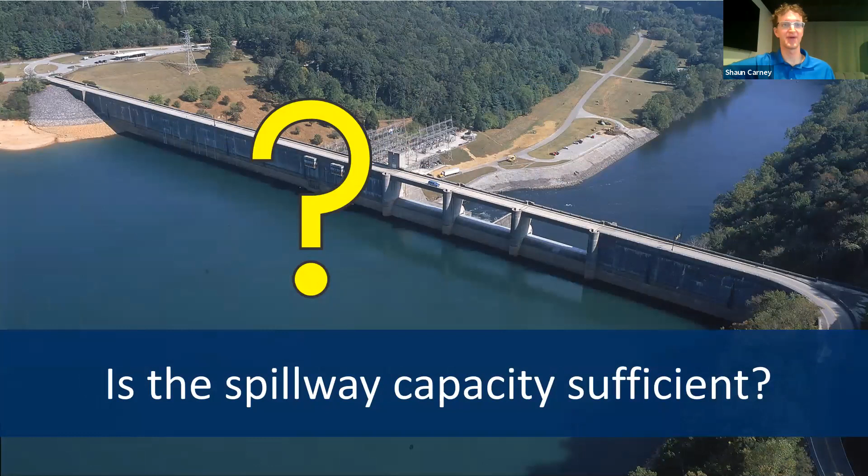If we're considering just a single dam, how do we know if the spillway capacity is sufficient, or how can we assess that? And so all these ultimately are asking the question, where should funds be spent? And how do we decide whether to address one issue or another, or focus on one issue or another? And so where does risk analysis fit into this whole decision-making process? And so we're going to be focused on risk today.

And so we thought we'd just start. There are three main components to risk, and we can break this up a little bit differently, but the three main components are the likelihood of the loading, that there is potentially a large flood that could come and overtop the dam, or there's a seismic event. And then there's the second component, the probability of failure given the loading. So given that a dam is overtopping or there's a seismic event, what's the chance that the dam could fail?

And then what are the downstream consequences? If a dam were to fail, what would be the consequences downstream? Or if some component of the dam were to fail, there might be less consequences. And so those are the three different pieces of risk.

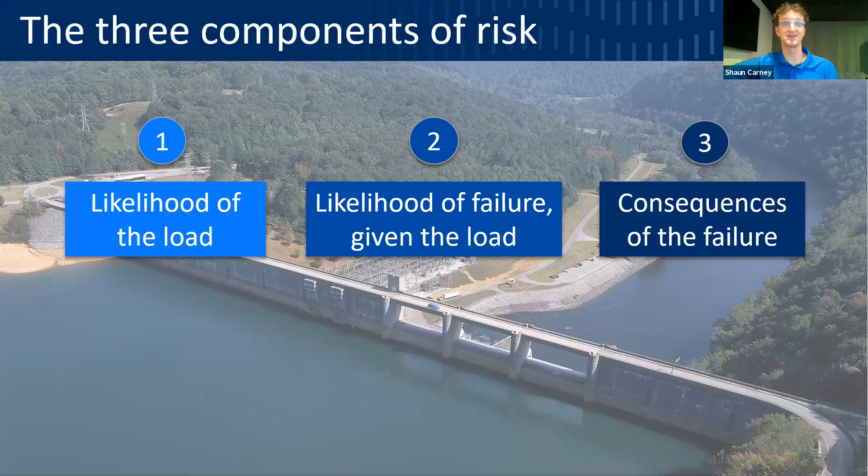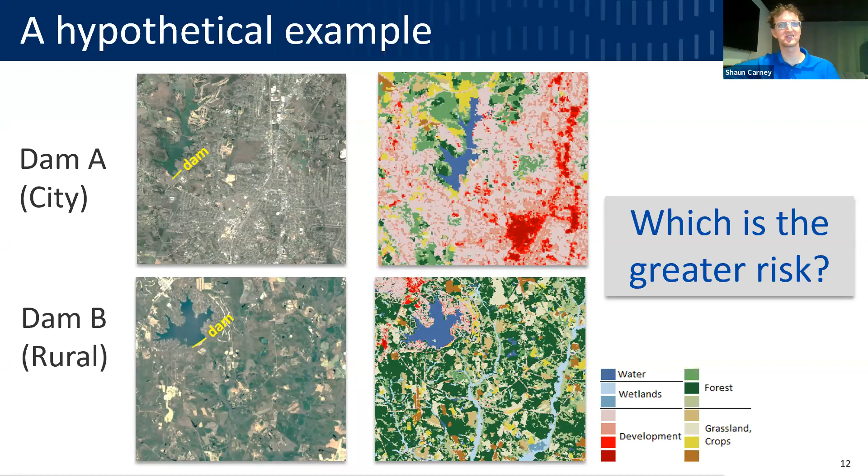And so we just wanted to talk through, just to start off, just to get our heads in this realm, a hypothetical example. If we're considering two different dams, one is located in an urban area, this dam A, and the other one in more of a rural area. Which one would we think, just off the top of our heads, is the greatest risk? Just put your mind there. And so what information do we have to support that when we think about these three different components of risk?

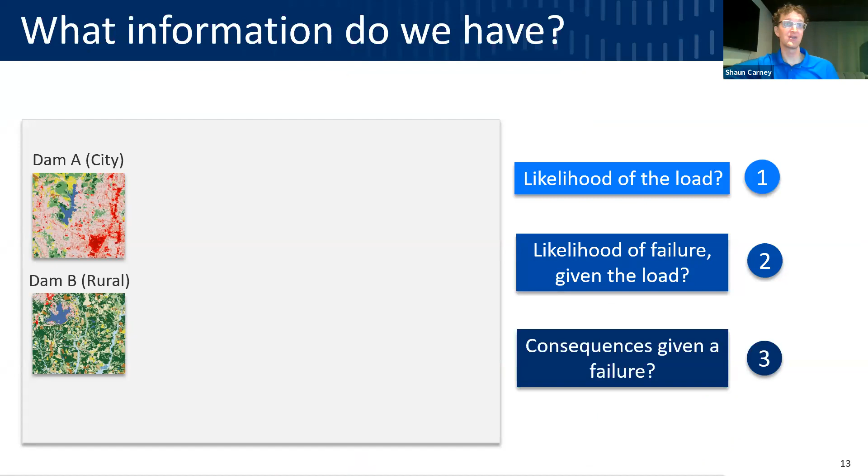Maybe there have been studies that have been done in the past, and we have some information about the dams. We know for the consequences that the dam above the city has a lot higher likelihood of life loss than the rural dam. But there still are people at risk below the rural dam; there could be some life loss below the rural dam.

On the PMF, we may have done a PMF analysis for both of these, and maybe the dam above the city can't pass the PMF, whereas the rural dam has a large spillway and there's no problems there. But we don't really know what the likelihood is of that huge flood, the probable maximum flood.

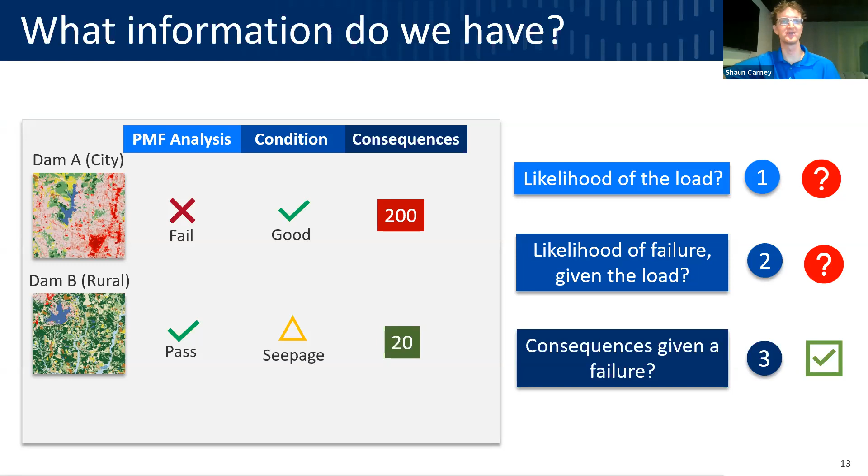And if we look at the condition of the two dams, maybe on the dam above the city, everything is in great working shape. It's been maintained really well because of the setting that it is in. But the rural dam has some seepage issues. But we don't really know necessarily what the likelihood of failure is given that. So here we have just a little example of one case where there are two different dams, two different issues.

So how do we look at that? How do we start to assess which one is the bigger risk? If I'm a regulator, which one is the bigger problem that we ought to be considering? So if we can start to put numbers behind some of these pieces, if we can say, okay, that PMF actually is more like a 1 in 500,000 event, or the seepage actually has a much higher likelihood that it could fail, then we can start to understand what's going on with those.

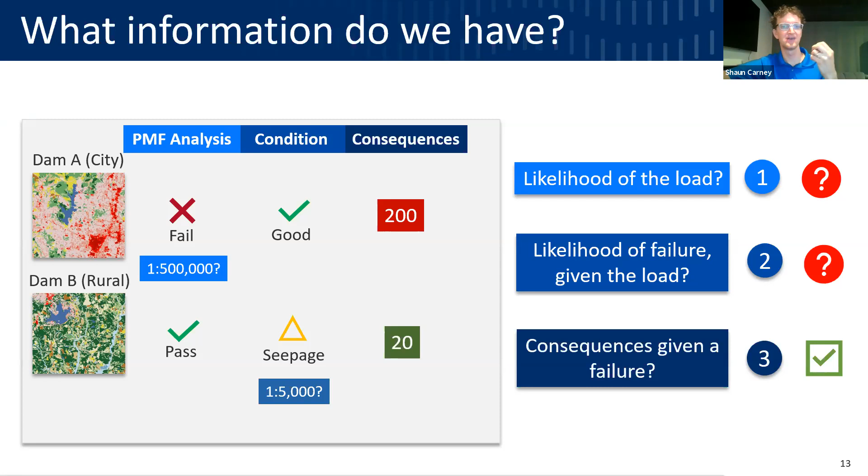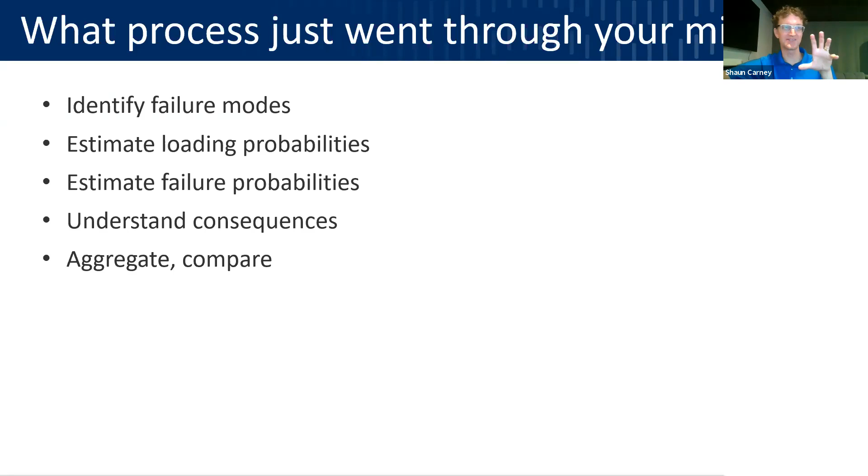And so what process just went through our minds there? First we step through and look at what the failure modes are. We try to estimate the different probabilities, maybe just as a hunch, and then understand the consequences. And in our minds we can pull all that together and say, okay, maybe this one is a bigger risk, or this is a bigger risk. So that really is risk analysis. Even though it's a very qualitative sort of sense, that is a risk analysis.

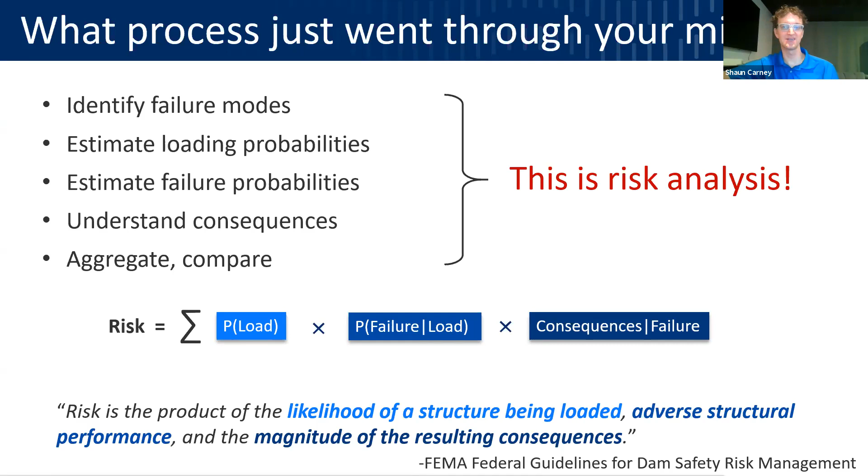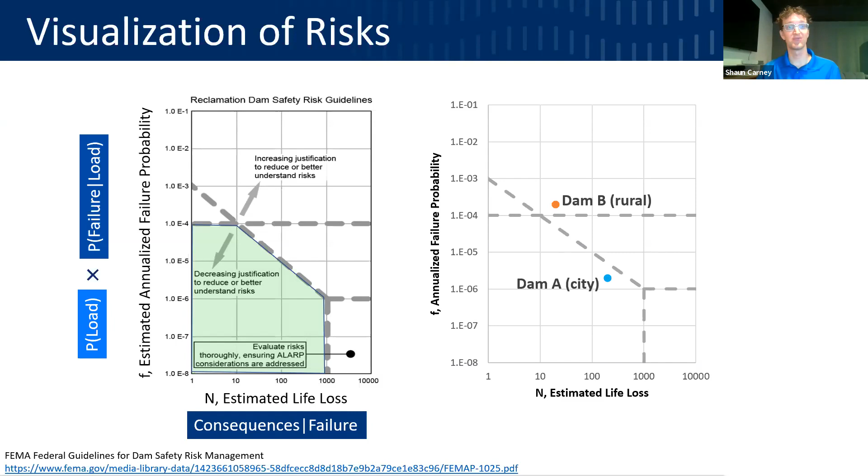And if we plot those on this graph, just using those numbers that we had come up with, in this case, actually the rural dam ends up being at a higher risk than that dam in the city. And so as a regulator, you might focus more on, let's get the issues with the seepage at this rural dam addressed first, and maybe if you have limited funds, focus on that one first.

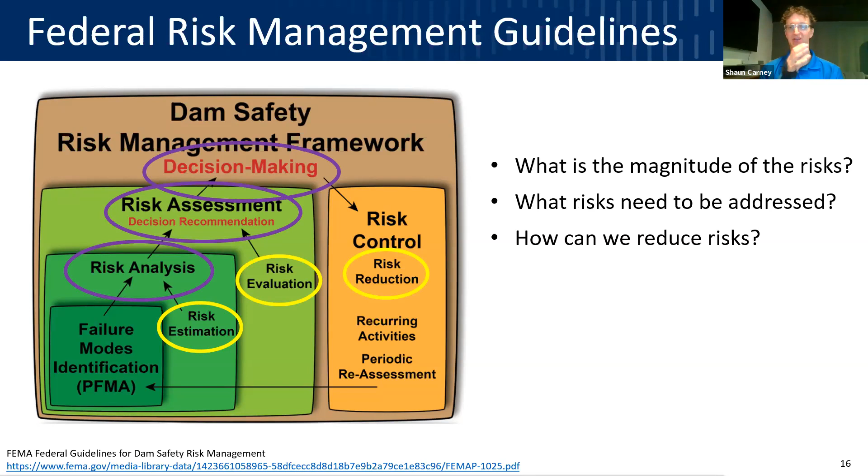And so the federal guidelines, they have this graph, which I think helps to put together the different pieces and how they all kind of fit together. So we have the failure modes identification, and then the risk analysis, which we're focusing on today, is focused on estimating what risks are. And that really, ultimately, that's not the end goal, though. The end goal is to assess how bad those risks are, and to make recommendations on what a decision should be. And an actual decision will have a lot of other factors play into it, but ultimately, this comes back to having a good estimate of what risks are for a given location.

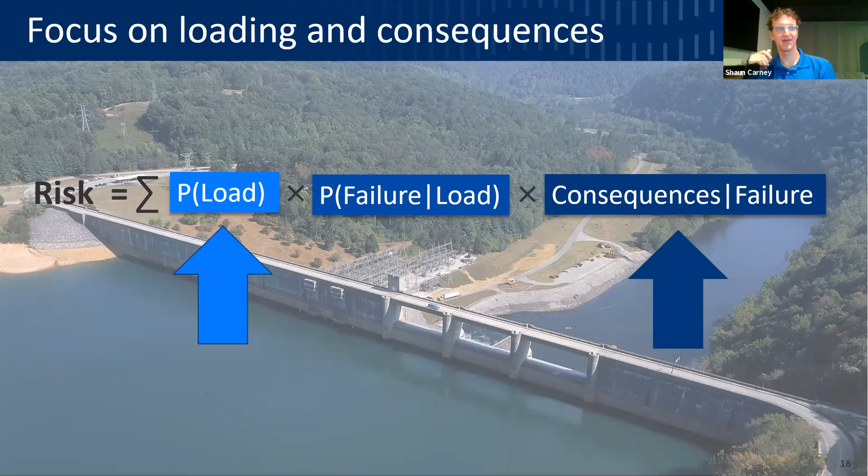So for the rest of this presentation, we're really going to focus on the probability of loading and the consequences given a failure, because those are the pieces that within the Center for Water Resources we have the most expertise in. That's not to say that the middle component isn't important. It's very important, obviously. But we're just going to focus on those two pieces and how those can play into the different levels of analysis that we were talking about up here. And so we'll start with talking about QRAs and SQRAs and kind of how this fits in.

So we'll start just with an example from Mactaquac Dam. This is up in New Brunswick. And for this dam, New Brunswick Power is undergoing rehabilitation over the next years. And so as part of that assessment of what needs to be done, they were assessing their spillway capacity and seeing whether it's adequate or they may need to expand that. And so Mactaquac Dam is sitting on a large watershed. It's essentially a run-of-river. There is some fluctuation in the pool, but there are low incremental consequences if there were an overtopping failure of the dam during a large flood.

And so they're looking at a really big capital improvement investment. And so the question really is, is the spillway capacity adequate? And so to start, they did an initial risk assessment at more of an evaluation level. And on that one, they found it looks like the spillway capacity could be within the tolerable risk guidelines, and that the existing spillway capacity may be sufficient.

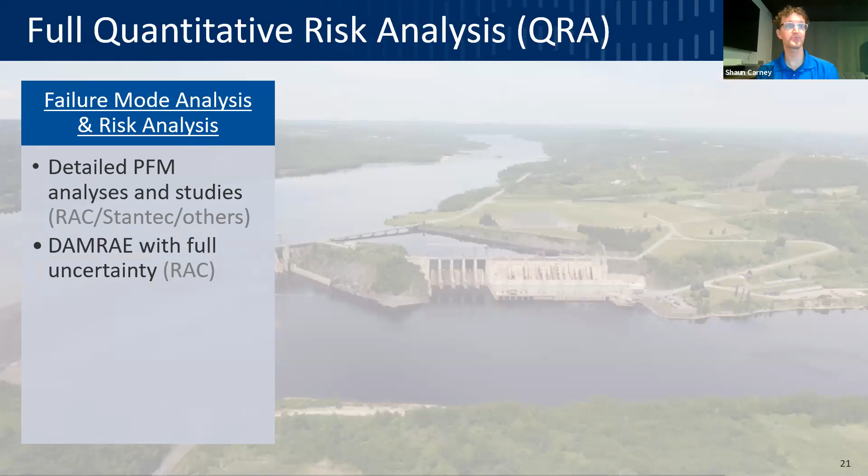And then Stantec is working on looking at the breach uncertainty, and then we'll be using LifeSim with full uncertainty to the specific PFM. So again, this is a case where they're at the point to evaluate, do we need more spillway capacity or not? And so it's a major capital improvement investment. And so it justifies doing a very detailed analysis to understand that.

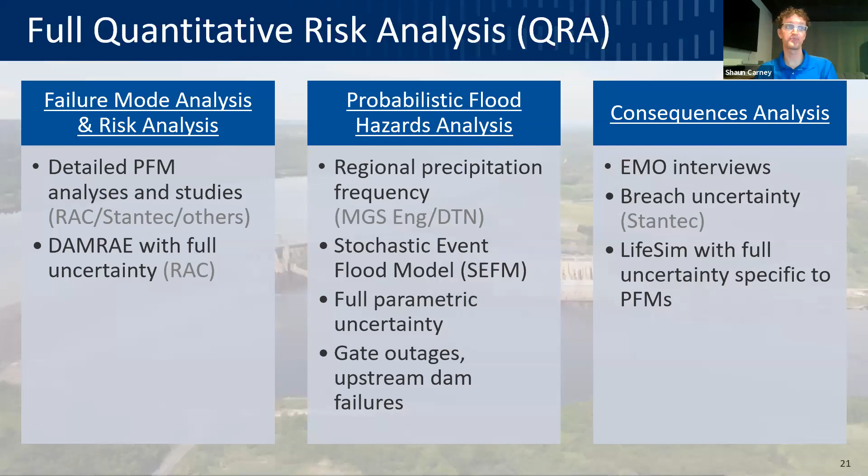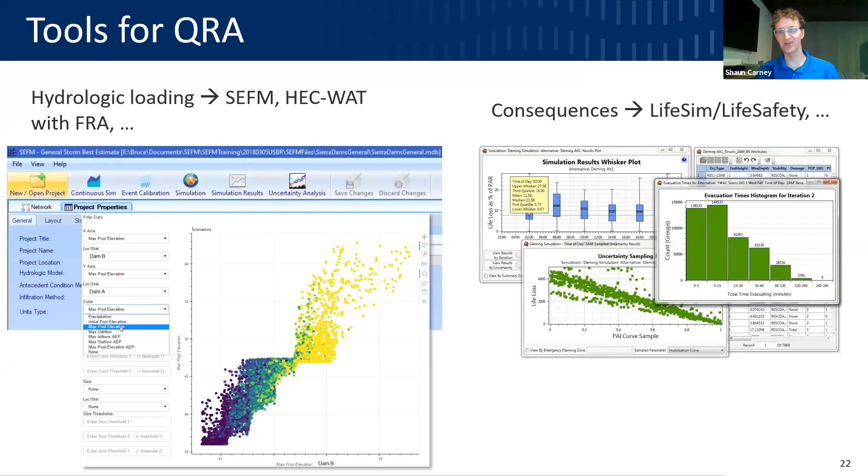But there are challenges with doing a full QRA. It can be costly. It can take a lot of time and data. And then to scale that up to a larger group of dams may not really be possible or really make sense because of the level of effort that's justified. So let's move on to the SQRA level.

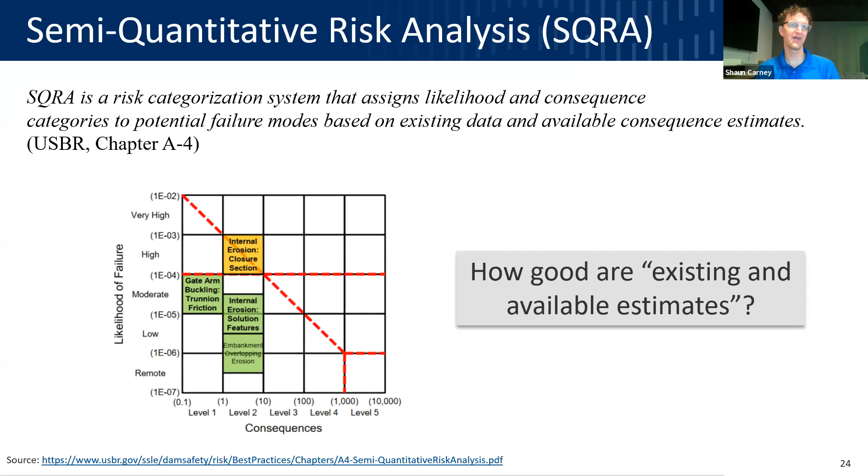And here, we're talking about different failure modes. And the idea is to use existing data and consequence estimates to understand risks. But really, how good are those estimates, and how does that influence things? And so, if we think just about the hydrologic loading, a lot of times we have a PMF, like we talked about earlier, but we need to make an assumption about how to translate from the observed record.

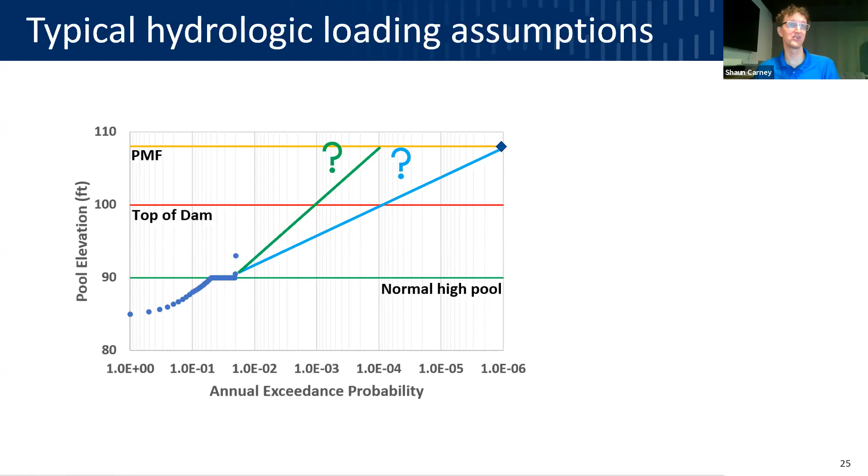Looking at the pool elevation, all the points over to the left of the graph may be observations, but then the PMF we just place out and make an assumption that, okay, maybe that's 10 to the minus 6. But how do we interpolate between the observations and that PMF level? Should we assume the PMF is actually a lot more common? Should we use a more gradual curve? So each of these assumptions affects the way we perceive the hazard associated with overtopping the dam.

And then if we look at consequences, similarly, consider that the green is the tolerable region. And so if we look at a particular failure mode, and maybe it's a 1E-5 level, and we've come up with a life loss estimate that puts us at about 20. Well, that's right on the border between the two.

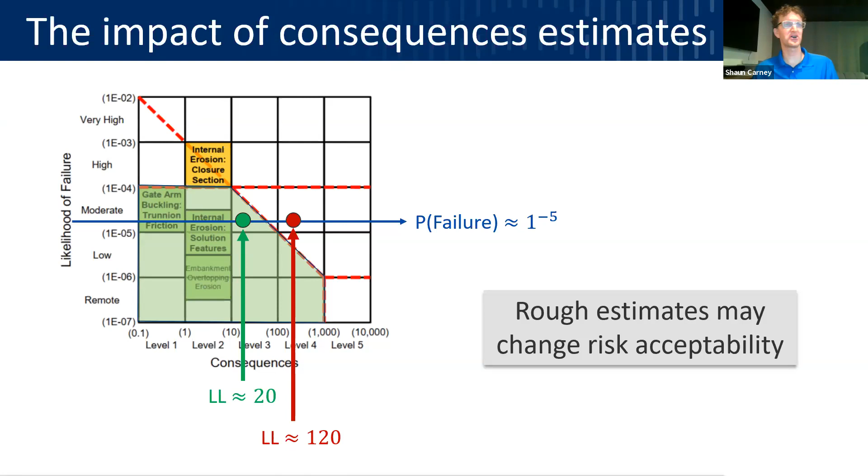But if our life loss estimate is actually higher, just 100 people, or there's 100 more people that could perish in a failure, then you really shift your understanding of what the risks could be there. And it can really change. If you have rough estimates, that can really change the risk acceptability. So I want to talk a little bit just about what TVA is doing on the SQRA level.

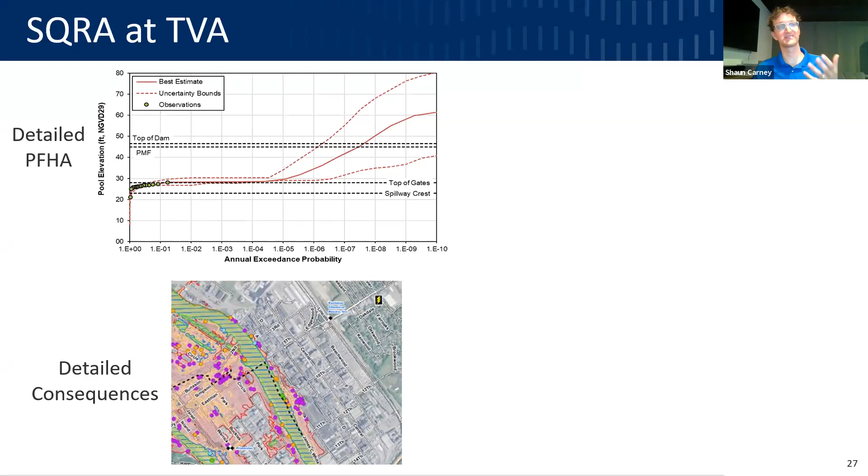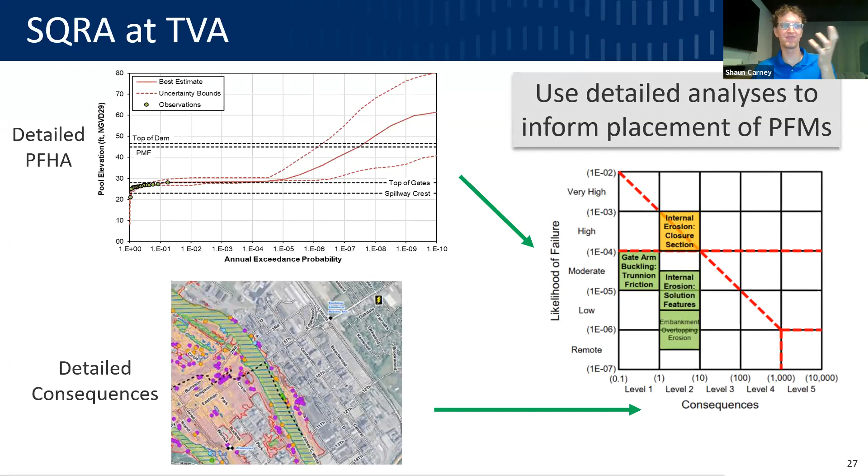They are using SQRAs, but we've helped them to do really detailed PFHA analyses to understand the overtopping probability. And then we've done very detailed consequences estimates to look at that. But then they're using that information to inform where they take the different failure modes and how they place that, how you understand what the consequences are under a given failure mode, and how you understand what the likelihood of failure is for those failures that have a hydrologic component to them.

So there are various tools that can be used for actually assessing the hydrologic loading and the consequences at more of an SQRA level, or getting towards the SQRA level. And so I want to talk briefly about the RMC RRFT tool. This is a tool that we are actually helping the Corps of Engineers to develop. They've recognized the need to really improve their estimates of the overtopping probability for their different dams, and so we're building this tool.

It's a web-based tool. The idea is you could upload a precipitation frequency relationship, or if you don't have precipitation frequency information already available, it will extract information from NOAA Atlas 14 to get the precip frequency, and from that, fit probability distributions. You can upload an HMS model, hit run, and it will do all the executions, all the sampling that's required, and then generate a hydrologic hazard curve for the dam. Jon's going to be talking a little bit more about that shortly.

But just to go back, we talked about the QRA level, where very detailed analyses are justified. On the SQRA level, maybe it's not quite as justified, and the concept is to use information that's available. I just wanted to use the TVA example to point out some of these tools that can be used to get to a more quantitative understanding of the loading and of the consequences. That can help improve those estimates that feed into the SQRA and help us better understand what those risks may be. So with that, I'm going to pass it over to Jon, and he's going to talk about some of the other phases.

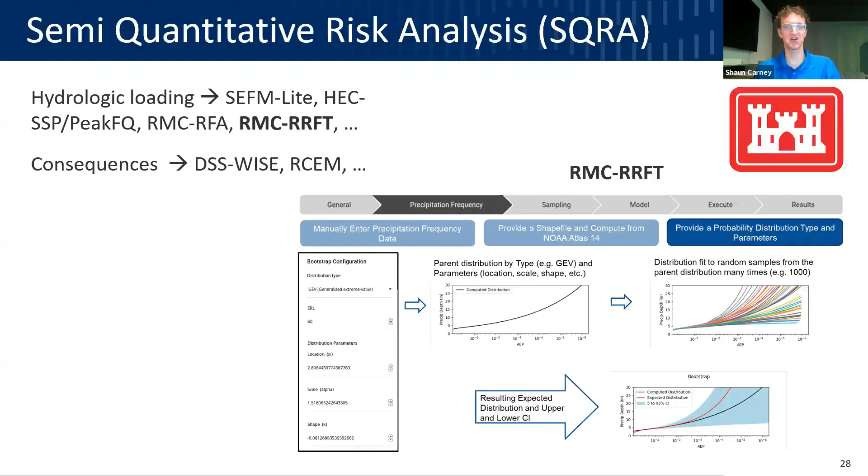Shaun talked about the QRA and the SQRA. I'm going to move to level 1 and level 2, as referred to in the FERC draft guidelines shown here, for periodic and screening methods. The focus here is on prioritization of the inventory. And what is it prioritization for? It could be prioritization for additional studies, so you want to look at the portfolio and understand what kind of studies should be used and what kind of information needs to be collected.

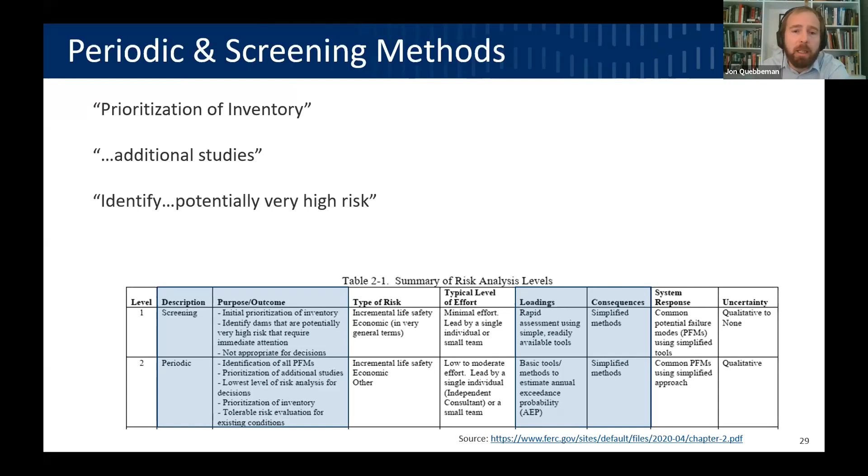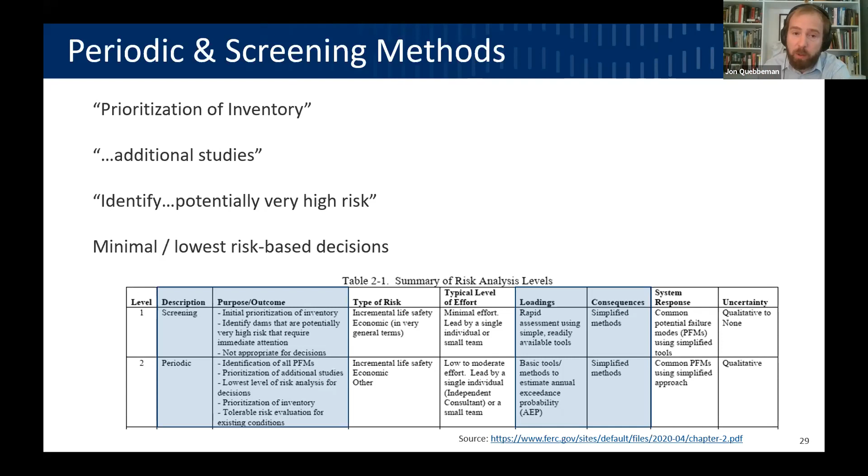Or it could be to look at your portfolio and identify some potentially very high risk dams, just gaining a base understanding of these factors at the screening or periodic screening level. In general, this is the minimal to lowest level for making decisions. Shaun said full QRA is for very large investments and decisions with significant impact, whereas here we're talking about screening levels, so different tools and applications are appropriate. We're going to talk about the tools and systems available to help support quantification of the loadings and consequences used within the periodic and screening methods.

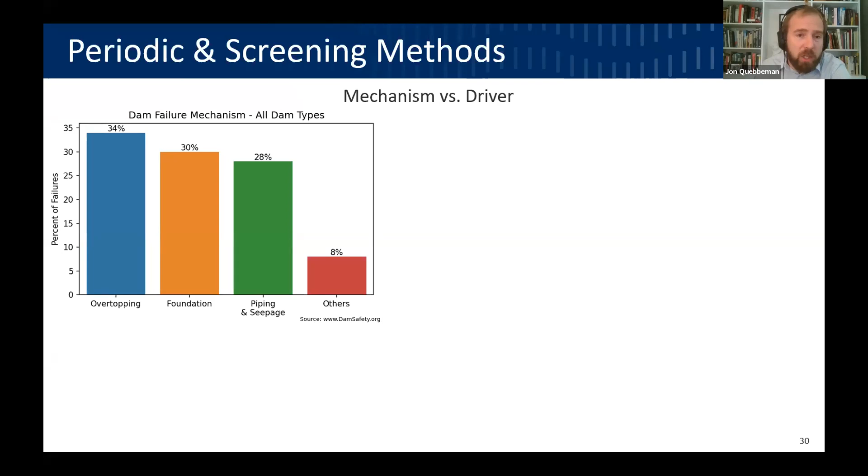All right, this is from ASDSO on their website, the dam failure mechanisms. If we look at all types, we can see from this collection of statistics that overtopping is 34% of failures, then foundation 30, and 28 for piping and seepage failures. This is good information to have at screening levels to help identify where we should focus some energy. But what's interesting, if we look at the incidence of the drivers, is that the hydrologic and flooding condition actually dominates the incidents themselves.

So it could be a piping and seepage failure, and it's because of a higher storage level that you've never experienced before, right? It's an extreme event. You've pushed the pool into the flood zone, and it leads to a piping failure. So the hydrologic and flooding conditions are quite an important factor when you're doing the periodic and screening levels. If you have limited budget and time to focus on an area, that's a pretty good area to focus on.

We can also look at some of the site-specific data that's required for each of these. And so for overtopping, it's minimal. You need to understand something about the watershed, you need to understand the hydrology and the salient features of the dam itself, including your storage levels, the gate conditions, spillway discharge capacity, etc. But with that information, you can actually do a decent job of estimating the overtopping probability.

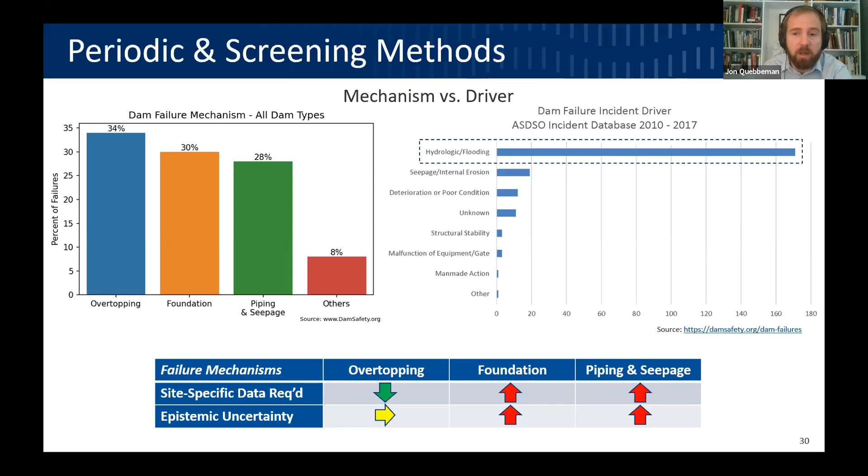Whereas the site-specific data for foundation or piping seepage, these are a lot more intensive. It requires as-built drawings, site-specific investigations, and scaling up to the portfolio level is challenging, or implementing periodic and screening methods does require more site-specific information.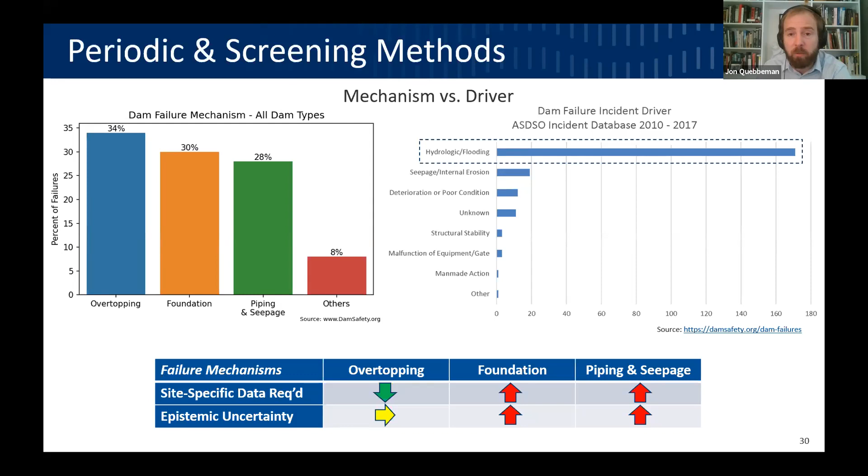If we look at the epistemic uncertainty, sort of the knowledge uncertainty, there's ways that we can try to quantify that with an overtopping, looking at the hydrologic loading conditions, where again, with foundation and piping seepage, it's fairly high. So the point here is that the hydrologic and flooding conditions are pretty important when we're looking at the screening level, again, with limited resources to be able to assess this.

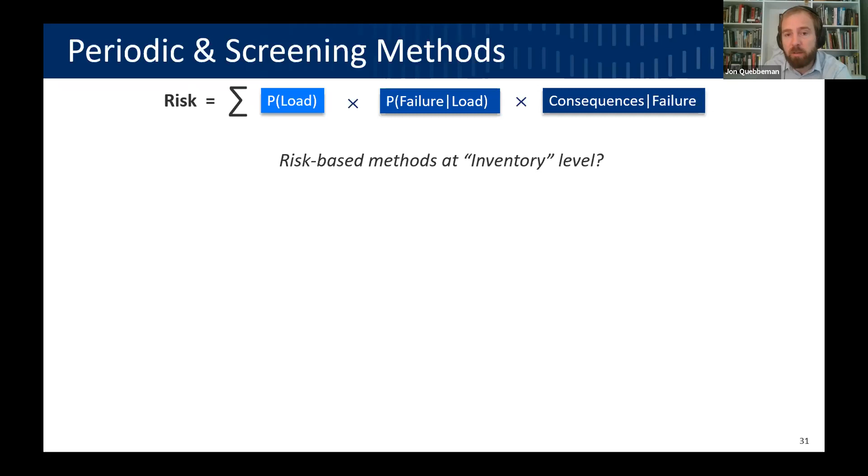So let's go to the quantitative side here, and let's look at the equation that Sean has been working through here. We have the probability of load, we have the probability of failure given load, and consequences given the failure. And so the question is, can we do risk-based methods with quantitative approaches at the inventory level? So what are some of the challenges here?

If we take the load, we might be looking at the PMF against the spillway capacity and simply asking, does it exceed it or not? But then there's a question, what is the probability of the return interval on the PMF? And that can vary widely. We can look at the statistical record, peaks of record, but the focus here might be on the 1E-3, 1E-5 levels, where we haven't observed those in the historical record.

There's statistical approaches that can be used, but how do we scale it up to some of these other extreme events? We might be interested in gate failures or blockages. And so what are those? How do we incorporate those into the loading condition?

The probability of failure given the load, there's generalized PFMs. We just looked at them for overtopping failure or for piping, et cetera. But again, it does require a lot of site-specific details. There's a lot of uncertainty, and we're going to talk about a way to address that as we move forward with some of these rapid risk techniques.

And then consequences given failure. There might be EAP maps, but they only have the sunny day or the PMF. And we could be interested in some of these incremental levels of storage or various intermediate events, pre-breach flood events that we want to consider. Breach maps may not be available, and this is certainly the case as we move outward into more of the international sphere, where there's limited studies that have been done to estimate the consequences.

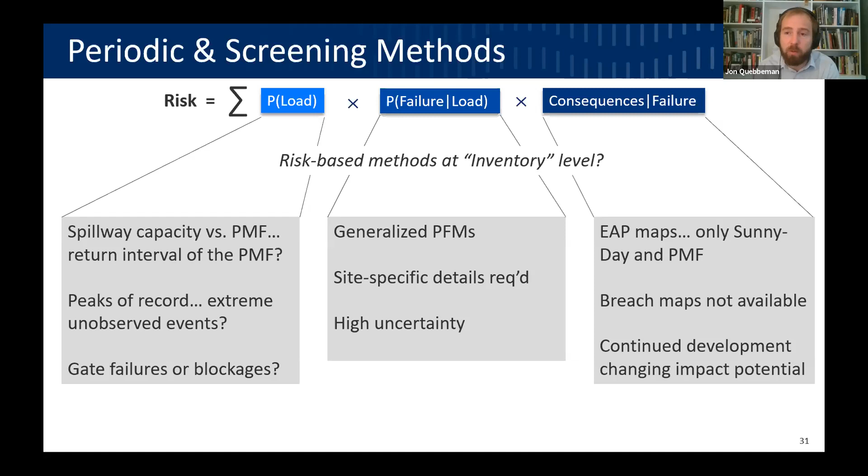And then continued development, as Sean noted, if you change from 20 people to 120 people, because there's now some new development downstream, that can significantly impact your risk profile.

So we're going to be talking about this general class here that we call rapid risk analysis, and essentially this is an extension of some simplified quantitative methods to support assessment of different components of risk at the inventory level that could be used for screening and periodic reviews.

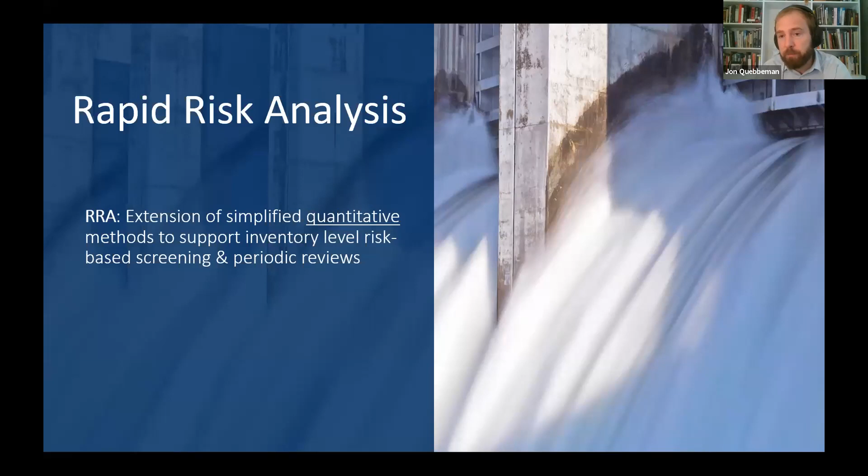And so what RTI has developed, we have a suite of tools. We call it the RTI Rapid Risk Suite, and we'll be focusing on the probability of load, and there's two main components, RTI WxGen and RTI QFreq. And then the consequences given the failure, again, there's a set of tools, RTI Breach and RTI Impacts.

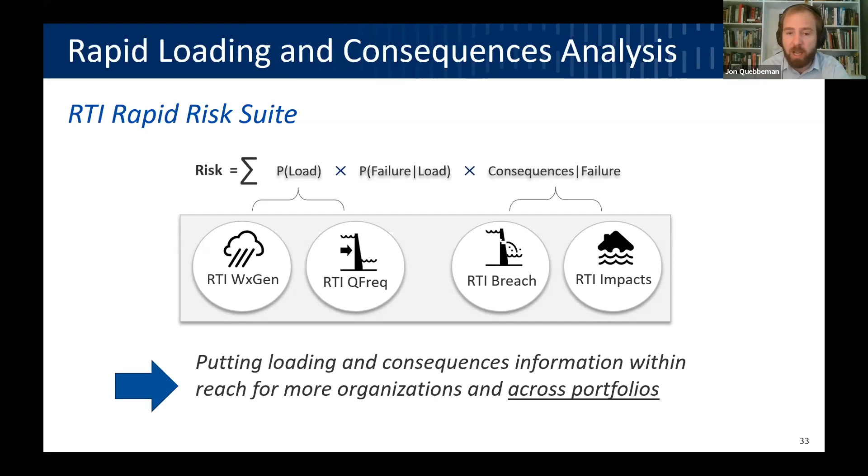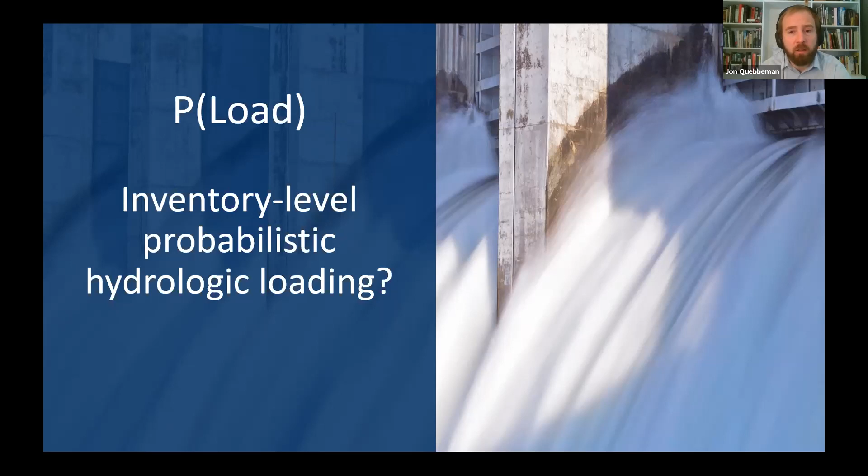And the point of building these is that these applications allow some of the loading and consequences information to be scaled up rapidly, and it makes it much more accessible. It's cost efficient and time efficient, especially as we start to scale upwards in size. And so first we're going to focus on the probability of load and talk through how we can look at inventory level probabilistic hydrologic loading conditions.

So we're looking at it from this deterministic approach, which could be a design storm approach or an AEP neutral approach, where we have a PMF event, we have historical events, or we have design storms. Something to remember, though, is that the 100-year precipitation may not always equal the 100-year flood, right?

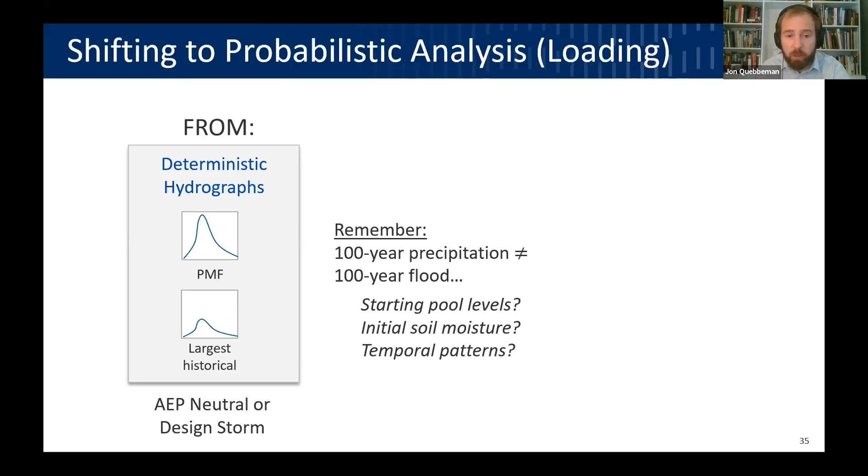That's the AEP neutral approach, and it can be a good approach if you have good initial conditions, but your initial conditions actually vary. If we're looking at starting pool levels, what's the probability of certain storages within the dam of interest or some of the dams upstream? What are your initial soil moisture? Is it dry? Did you just have an event? The probability of those soil moisture conditions change. And the temporal patterns for the precipitation itself also vary. And all of these can impact. You can have a 100-year precipitation with a much larger flood response or even a smaller flood response.

And so that process of evaluating that is moving us towards a PFHA, a probabilistic flood hazard analysis approach, where we actually can assign some annual exceedance probabilities to metrics of interest. This could be your inflow levels, this could be volumes of inflow, this could be your reservoir levels. And we can gain a better understanding of what the probability of exceedance is for those different extreme events.

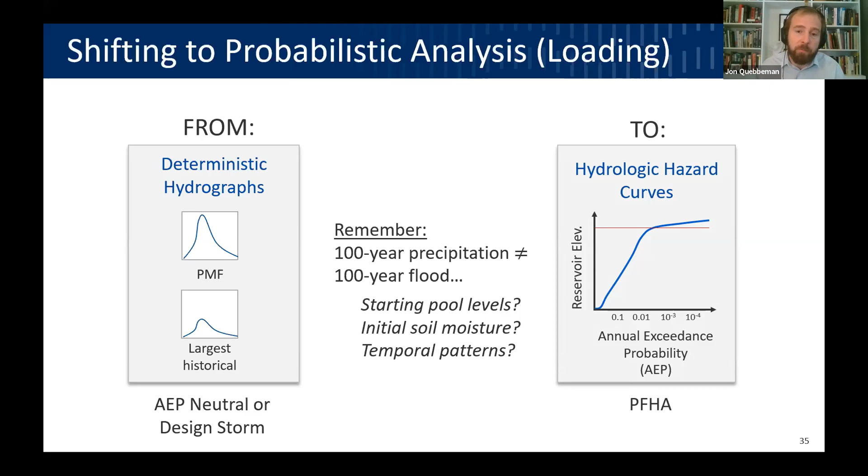We also need a set of initial feasible conditions. This is the soil moisture, snowpack, et cetera. And so those feed into a hydrologic model. We then run this, develop the hydrology, put it into a reservoir model or models, and repeat this process thousands of times, sampling from this information. And then we collect all the outputs, such as peak pool elevation, inflow levels, volumes in inflow, and we aggregate it to create these hydrologic hazard curves.

The challenge here again is how do we get all these components, and then how do we do it at portfolio scales, right? This is the RRA approach that we're discussing here. And that's where some of the tools, the RTI WxGen and the RTI QFreq can come in, is the development of these to scale rapidly.

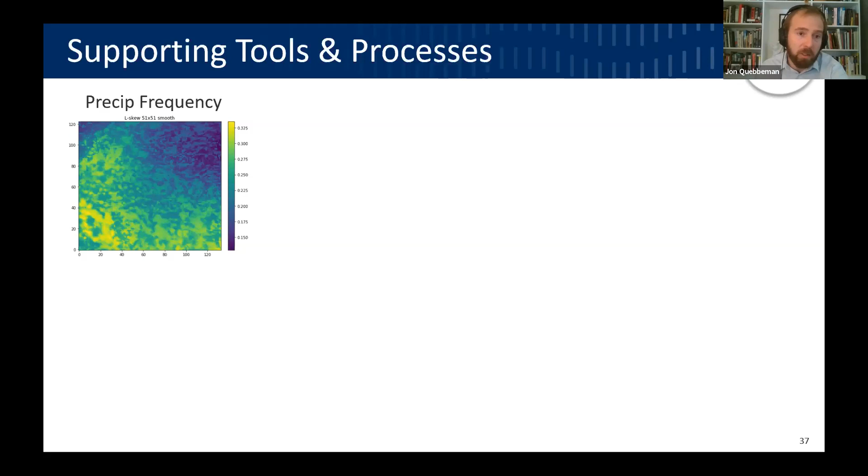And so you can use within the United States something like Atlas 14 or AORC gridded data, or internationally, you can get into MSWEP or even ERA5 to just try to get estimates of some of the extreme precipitation events. The other piece here is the storm templates. And so this is how do you scale the precipitation and apply it both spatially and temporally across your watershed. These again can be developed using remote sense data to develop estimates. Again, if you have good information, storm transpositions and other templates to use, by all means you can use it. But if you need a rapid set of templates, these can be scaled from the available information.

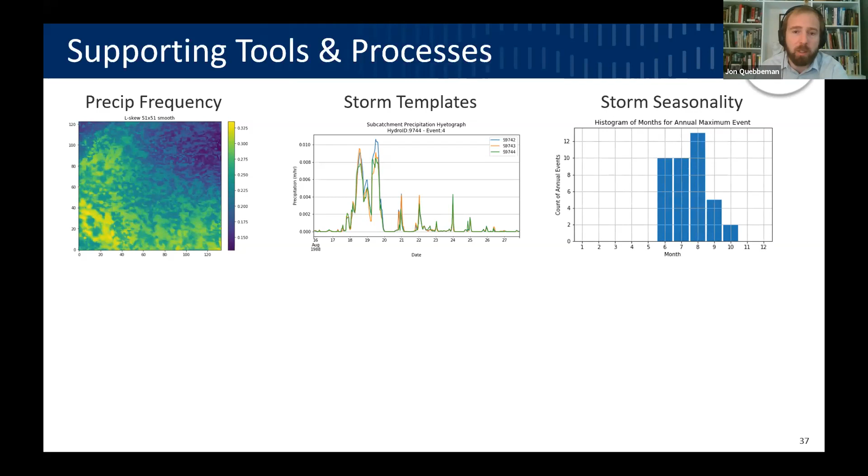We also need to look at storm seasonality. And so this is when do the maximum events occur? And this is very important because is it a spring dominated or a monsoon dominated event? And so we understand the timing, and the timing is important because that affects the initial conditions, including your snowpack. What is the approximate level of snowpack, the starting level within the watershed? This also affects your reservoir levels. Again, looking at the season, where is it? We can sample randomly from these distributions of starting pool levels and use that to initialize the models for each one of these simulations that we prepare.

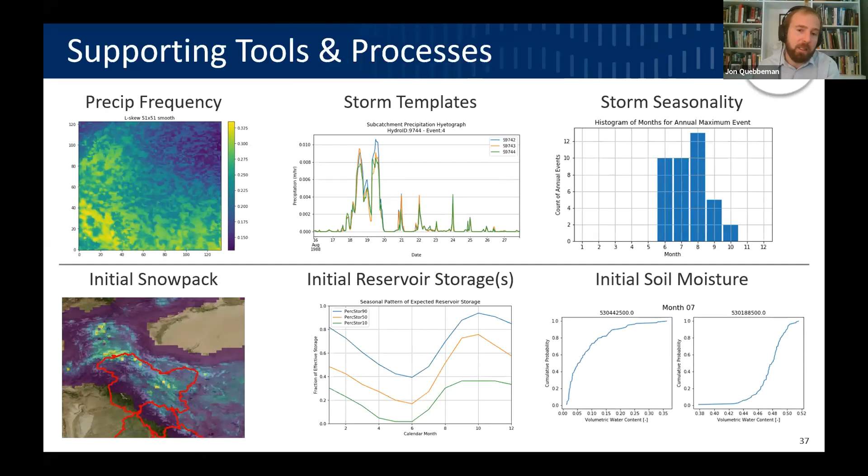And then finally, we can look at the initial soil moisture. We're just showing here the CDFs of soil moisture. And so we can sample from those randomly, apply it to the watershed, again, by month. And so all of these are used to develop some of the inputs. One of the other components here is the HEC-HMS models or the hydrologic models.

And so we've created this application with RTI QFreq for an automated HEC-HMS model development. Again, I want to emphasize here, if you do have existing HEC-HMS models, by all means, they can be used. But in many cases, if you have a dozen dams, if you have 100 dams, 1,000 dams, you may be interested in developing these rapidly to at least develop some initial estimates.

And so we use the base hydrocorrected DEM, dam locations, salient features of the reservoirs and the dams, and general land cover information, and that results in automatic production of these HEC-HMS base files. And they're parameterized with time area unit hydrographs, Green-Ampt losses, and include regulated flows, not just at the dam itself, but also looking upstream. And that's an important factor, as we can include the reservoirs upstream of the subject dam of interest as well. And very rapidly, we can create hundreds or even thousands of these HEC-HMS models.

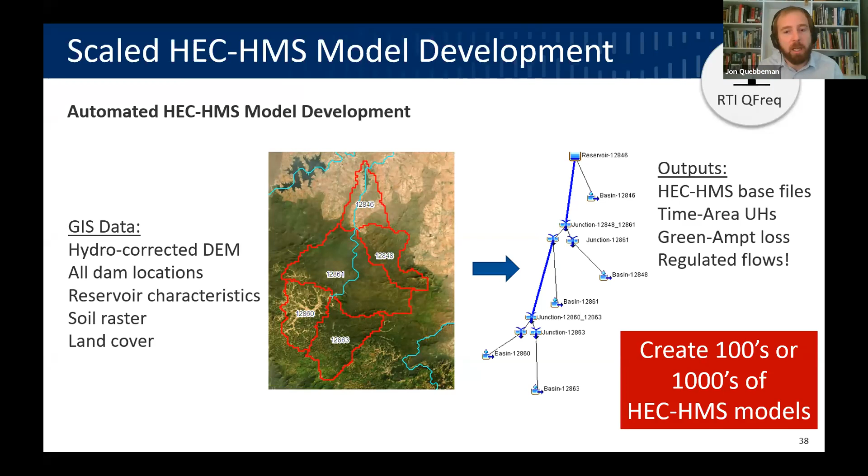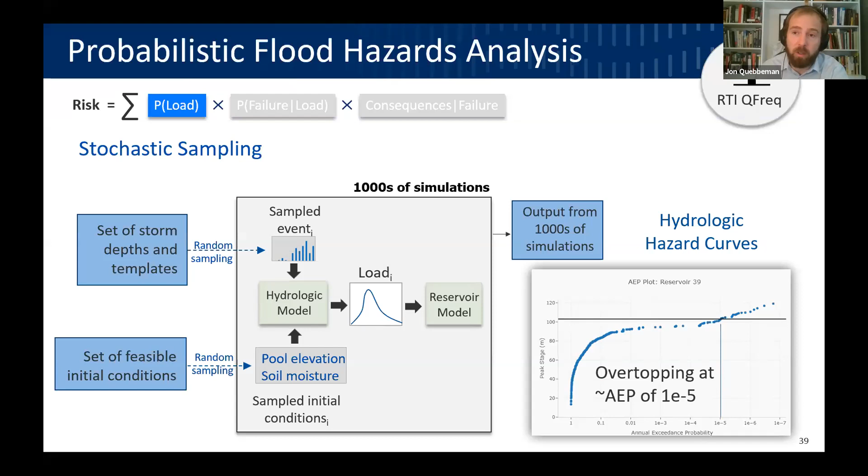And the outputs from that are these hydrologic hazard curves. And so this allows us to get estimates of the annual exceedance probability. And so, for example, here at this sample dam, we can see that there's an overtopping AEP of approximately 1E-5. And that's really informative to know that it's about a 1 in 100,000 year compared to if the dam was showing overtopping at 1E-3. And you might have a different set of actions for dams that show more common overtopping probabilities compared to more rare overtopping probabilities.

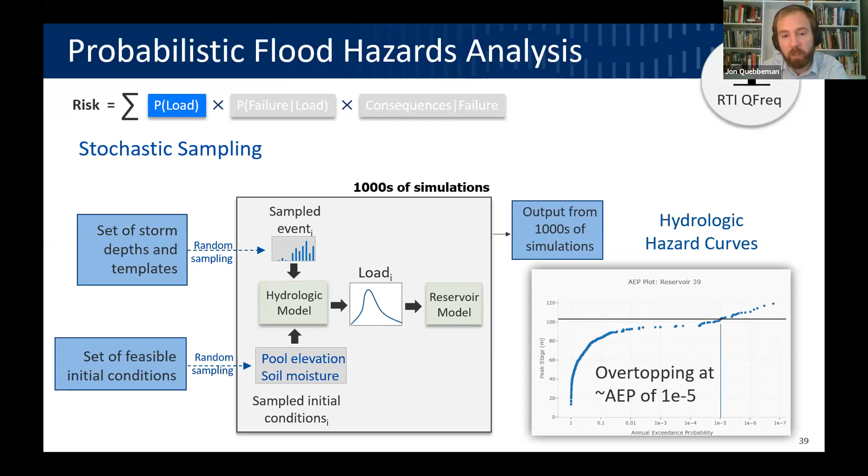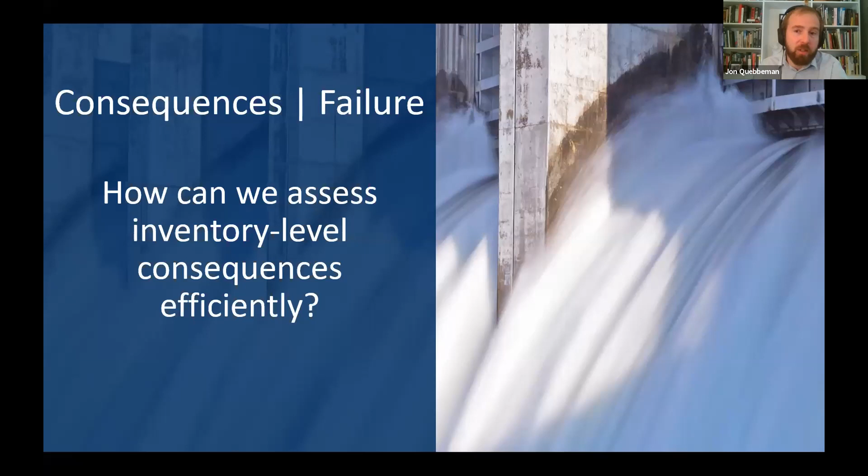Now let's go to the other side of the risk equation here and consider some of the consequences given failure. Again, in the light of rapid risk assessment or analysis, and at the screening and portfolio levels. So how can we assess the consequences efficiently at scale? So similar to the HEC-HMS model process, we also have developed this automated 2D HEC-RAS model development. If we take base DEMs, dam locations, land covers, we're able to rapidly create these RAS models.

I also want to emphasize here, if you do have site-specific RAS models, we can use those, right? This whole process is extremely modular. But if you do have a large portfolio, you need a rapid estimate of consequences, this tool can easily scale up to the portfolio level.

The runtime data include the hydrographs, the breach hydrographs per scenario, which can include variable pool starting elevations or pre-breach flood events. And so we can run all of those scenarios, and the outputs are the RAS model itself, which is an actual product, in addition to the results, which are the breach scenarios, including the depth and velocity grids as we move downstream. I will say this isn't as robust as doing site-specific breach models, but the intent is to scale it up: how do you move this to the portfolio or inventory level, allowing us to create hundreds or even thousands of these models very rapidly.

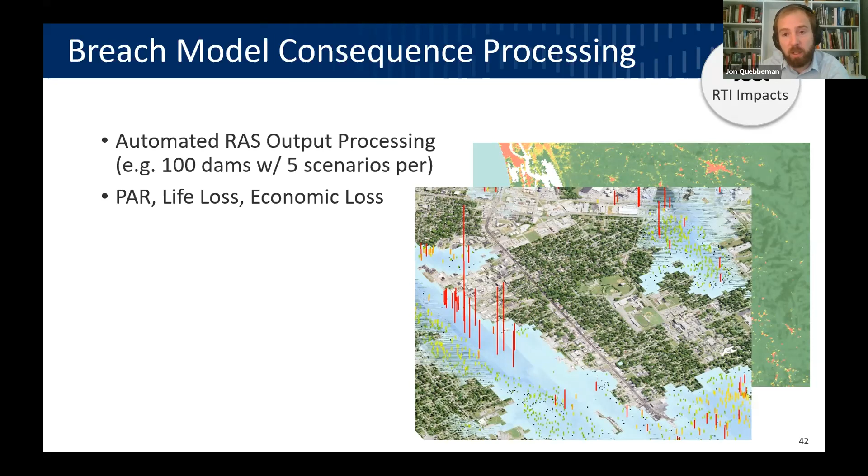And so with that data, let's just take an example here. If you do have 100 dams and you have 5 scenarios per dam, you have 500 sets of results that need to be processed. And so we've automated, in a simplified way, again, for rapid screening, the RAS output processing. And so we are able to develop estimates of the population at risk, life loss, or other economic losses for all of these scenarios, and develop summaries for each one of the dams within the portfolio, ingesting a number of different data sets.

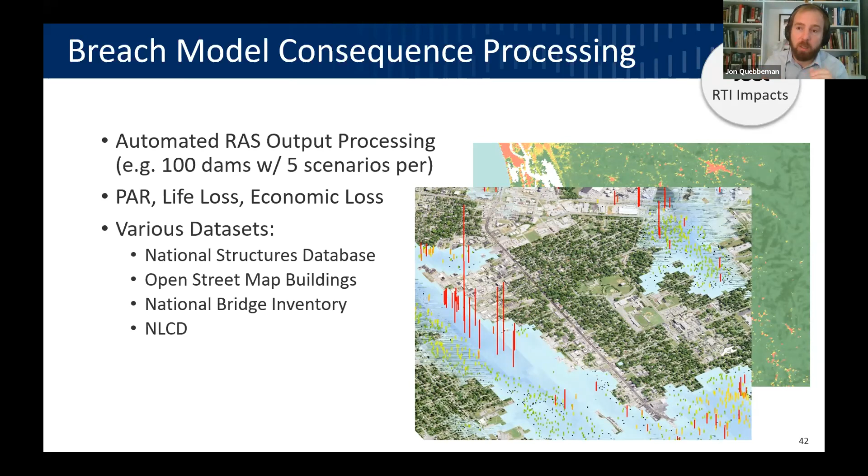Just a few examples here. If you have a structures database or OpenStreetMap, National Bridge Inventory, or other land covers, all this information can be used to help develop estimates. Again, I want to emphasize, this is not as robust as FIA or LifeSim, like Sean has mentioned, but this is a way, at the screening level or the periodic level, to develop some of these estimates. So let's look at just a few case studies for some practical examples of how you could apply these tools.

And so looking locally here in Fort Collins, the question might be which dams in this area are at highest risk of overtopping. And so what can be done is using the RTI QFreq, and there's an existing set of precipitation frequency relationships, the Colorado, New Mexico study that was completed by MGS and DTN. And this information could be applied within the sampling routines once we have the hydrologic models for all these dams. And that would develop a portfolio level assessment of potentials for overtopping, both the inflows, the volumes, and overtopping potential for these structures.

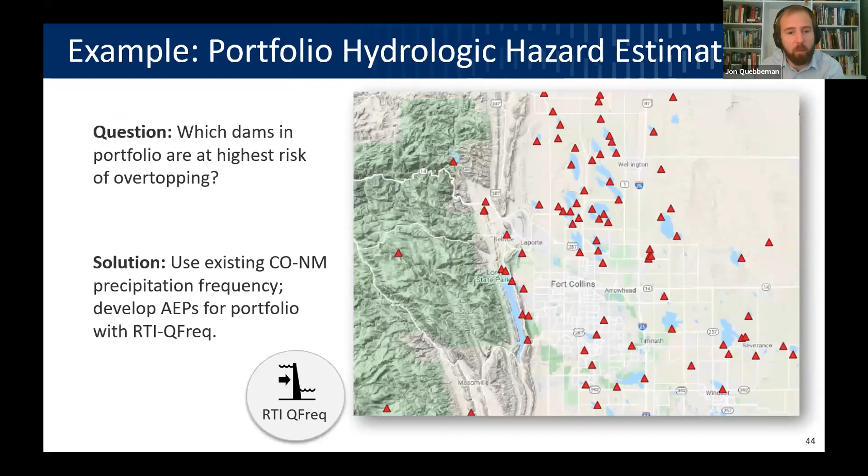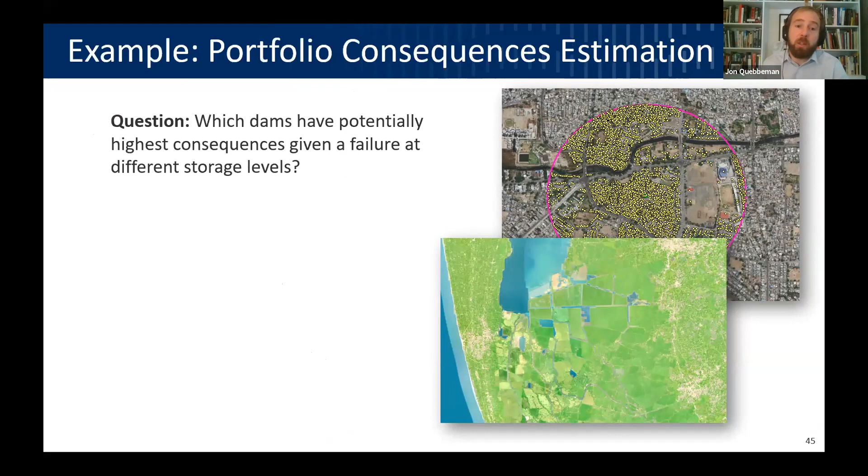Let's look at consequences. And I want to say you can just do the overtopping probability. You don't have to do the full suite, right? It's very modular. And as we move into the consequences, you might be interested in just the consequences estimation to ask questions of which dams, should it fail, we're assuming it does fail, which ones have the greatest impacts at different levels. This would be a combination of RTI breach and RTI impacts.

And so we can scale these up to the portfolio level to develop estimates of population at risk, life loss, both for the direct impacts because of the breach, but also indirect impacts. There might be recreational losses, lost flood protection benefits, et cetera. And these can all be quantified.

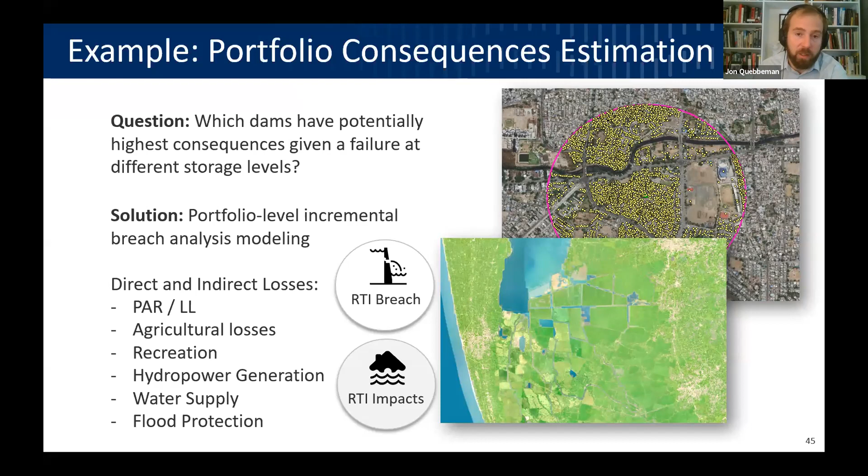Scaling up to the portfolio assessments, we might ask questions like, what are the estimated benefits, benefit cost ratio for a set of investments for dam safety improvements at the portfolio? Or similarly, if you have a set of fixed funds, which projects should be prioritized across a portfolio? And this is part of the RTI impact suite. And so you can develop an EFA, an economics and financial analysis, develop capital improvement options, et cetera.

And again, this requires that middle piece of the risk equation. This requires understanding the fragility, the probability of failure given the loading itself. But if you have those estimates, this can be scaled up and you could look at the reductions in risk from certain investments.

The middle piece I want to talk about briefly here because it is highly uncertain, and it can be an intractable problem trying to scale this up to the portfolio level. To try to address that, RTI recently has developed this online risk application. We call it the RTI Interactive Risk Calculator, and we can ask questions like, how does the risk change if the overtopping SRP changes?

And so, for example, we've broken out here 3 different dam types. We have earthen, masonry, and concrete, and we're able to change the SRP relationships and then identify how that impacts the risk. There's a lot of uncertainty in those, but at least we can see what does it do for prioritization. If you move your SRPs in a certain direction, do certain dams still remain at the top as a high priority for potential overtopping failures?

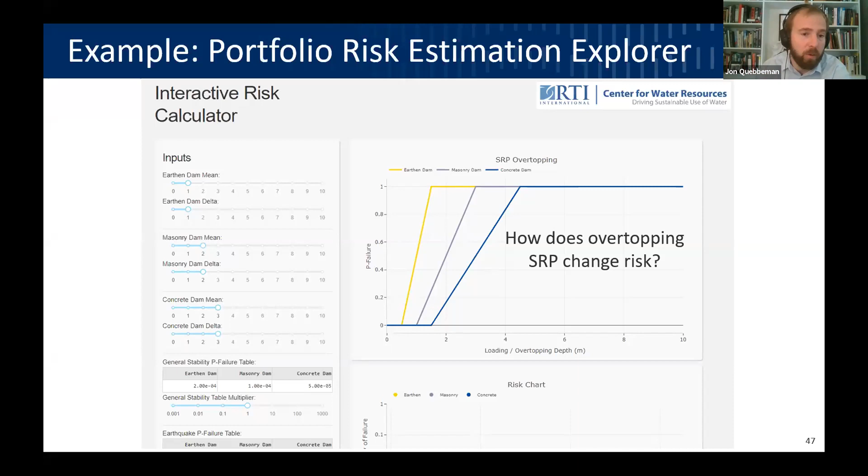And so it allows us to interact with both the probability of the load and the consequences to estimate some of the risk. We can also, within the calculator here, ask questions like, what if we adjust the AEP? And so in here, we can put in elevation thresholds. If you add a new spillway, this is going to change the probability of different reservoir levels. We can see that it shifts, and we have a shift here. And the annualized overtopping P failure will change. And so that value will interact, and we can see the impacts of adjusting the AEP.

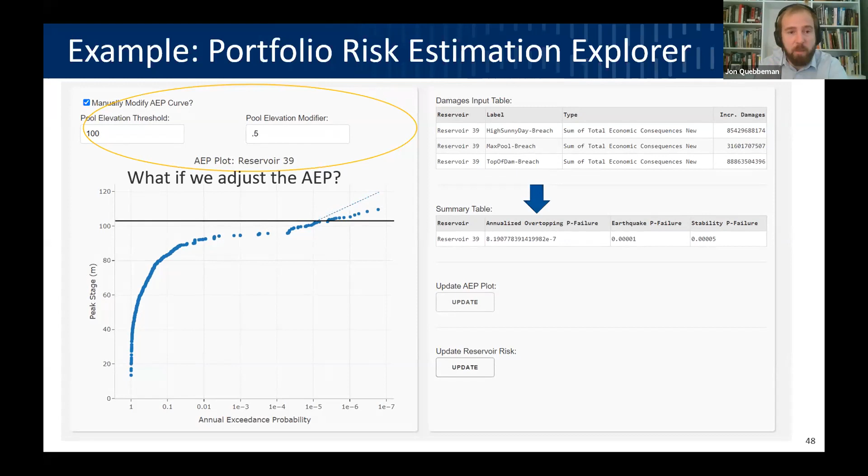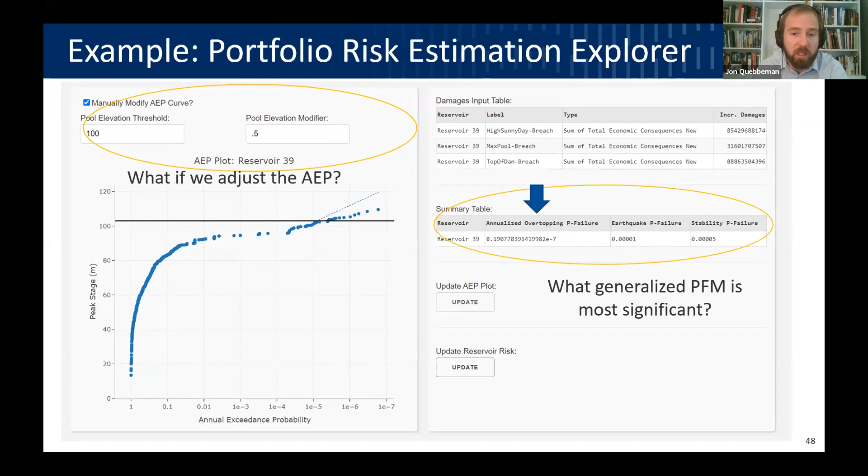And you can also compare it if you do have estimates on earthquake or stability P failures or other modes. You can do comparisons between these to identify which one is the most significant and where efforts should be focused.

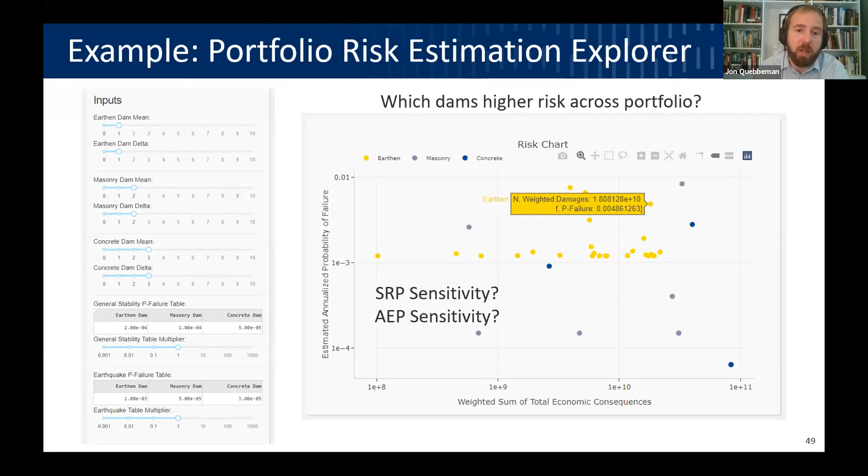So moving forward, when we do the risk analysis at different levels here, we're looking at the probability of some event and the impact. And so if you quantify these, you can kind of get a sense of which one of these 4 classes you're in, right? And understand the portfolio a little bit better.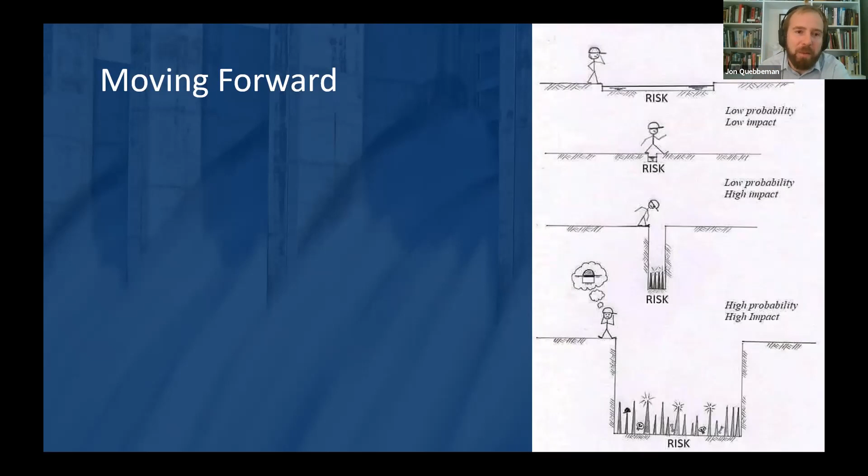But it's important to remember that the questions should be proportional to the methods employed. If you have a very large capital investment decision to be made, the rapid screening approaches are certainly not appropriate. But if you do have a portfolio and you have limited information to support prioritization across the portfolio, you may want to look at some of the rapid screening methods that we've discussed here to at least get that initial idea.

And again, this is quantitative, right? This is not just working with the information you have, but we're using quantitative methods to develop some of these estimates, both on the probability of loading side and the consequences given failure. And if you have fragility, that can be aggregated into estimates of the risk. And it can be scaled up at the portfolio scale, right?

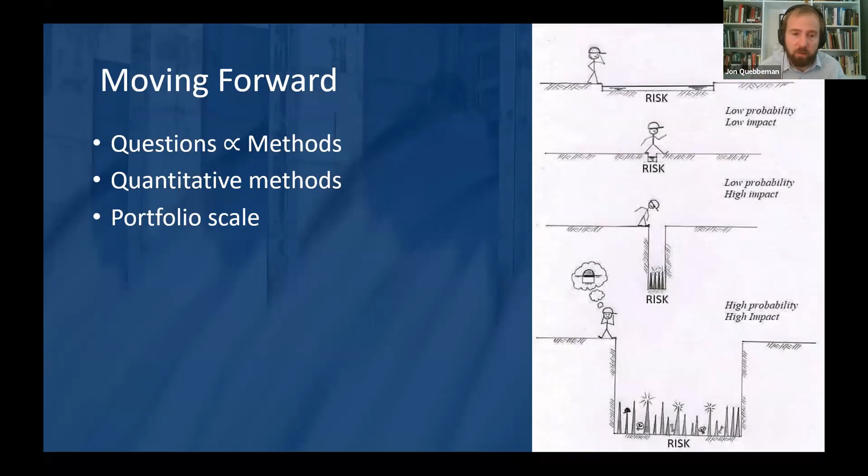A lot of these tools and processes exist, but they're on a dam by dam basis, whereas here we can implement these to a much larger scale in a very cost and time efficient manner.